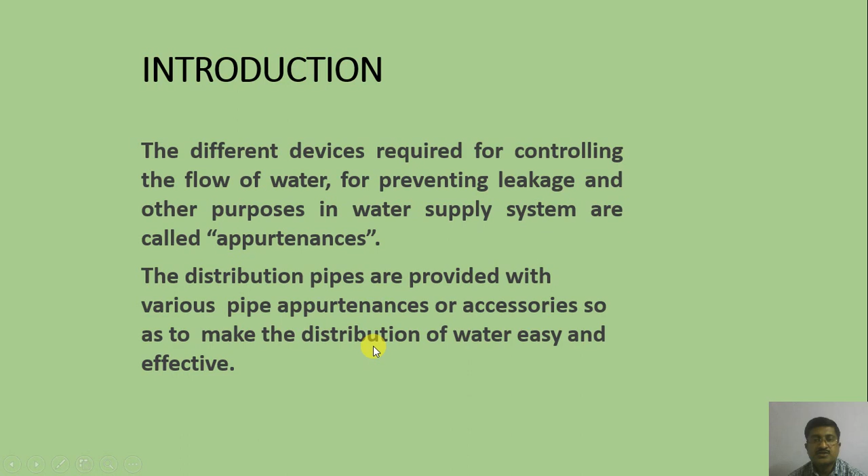What is the necessity of the water supply appurtenances? The main purpose of water supply appurtenances is to make the distribution of water easy and effective, to avoid the wastage and leakage of water, to change the direction of flow of water in the pipeline, to make efficient use of water, to control the flow of water in the opposite direction in the pipe, and to regulate the flow of water.

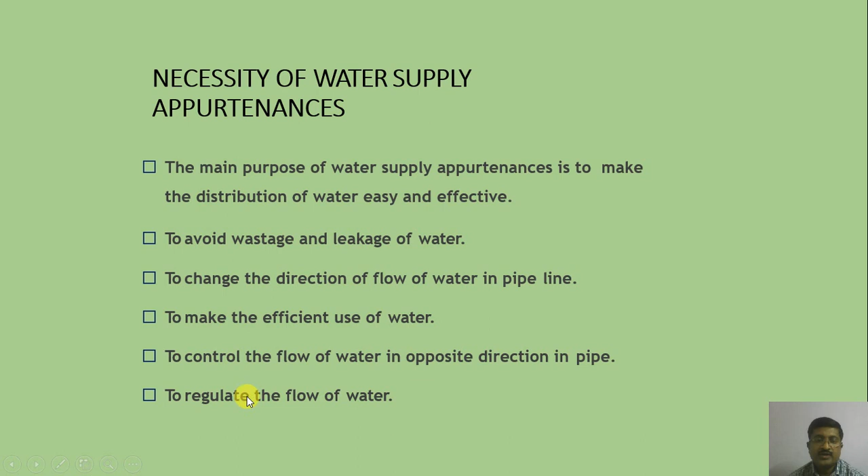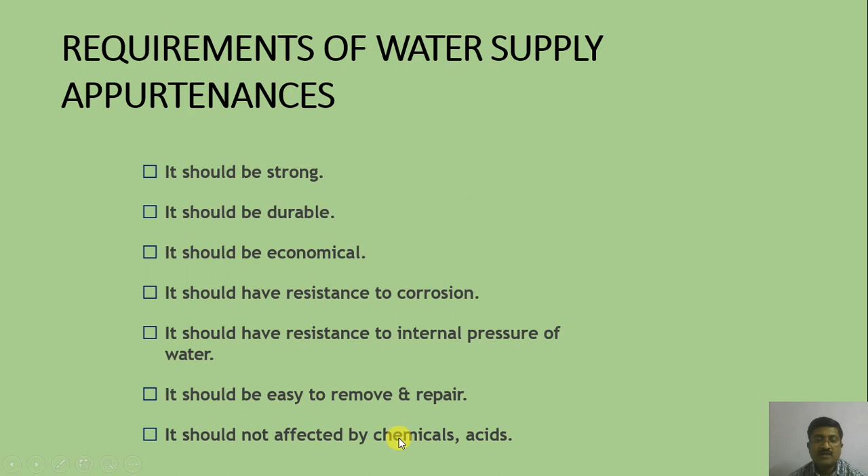What are the various requirements of water supply appurtenances? It should be strong, it should be durable, it should be economical, it should have resistance to corrosion, it should have resistance to internal pressure of water, it should be easy to remove and repair, and it should not be affected by chemicals and acids.

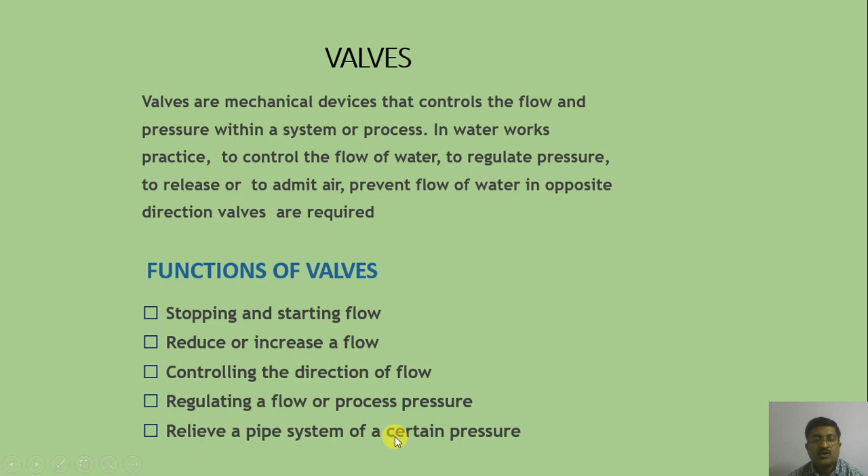Now let's discuss the valves. Valves are mechanical devices that control the flow and the pressure within the system or process. In waterworks practice, valves are required to control the flow of water, to regulate the pressure, to release or admit air, and to prevent flow of water in opposite directions. Functions of the valves are stopping and starting the flow, reducing or increasing a flow, controlling the direction of flow, regulating a flow or process pressure, and relief of a pipe system of a certain pressure.

Types of valve. Depending upon different situations and requirements, different types of valves are used in the supply system. First is a sluice valve, also called a stop valve. Second, check valve, also called a reflux valve. Air relief valve, also called a float valve. Drain valves, also referred to as blow offs. Zero velocity valve, scour valve, ball valve, and fire hydrant.

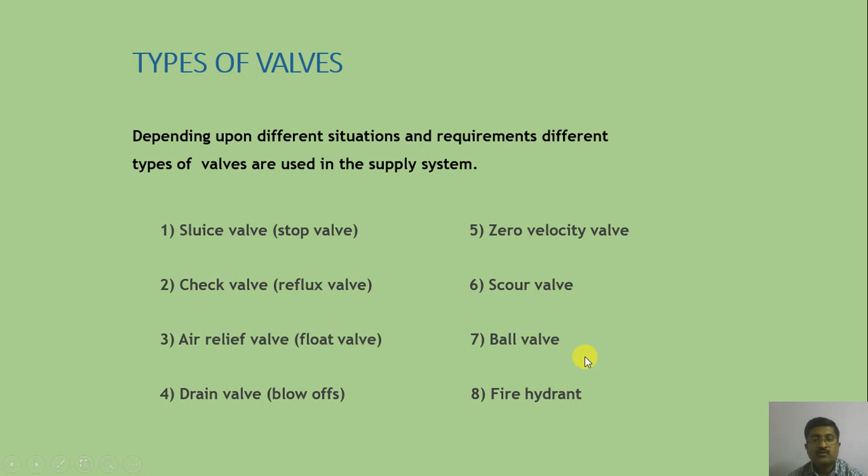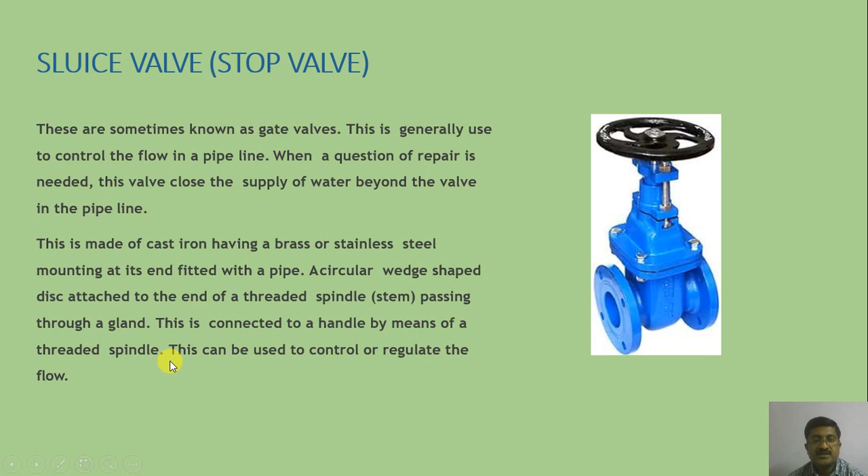This is made of cast iron having a brass or stainless steel mounting at its end fitted with a pipe. A circular wedge-shaped disc is attached to the end of a threaded spindle or stem passing through a gland. This is connected to a handle by means of a threaded spindle. This can be used to control or regulate the flow.

Sluice valves or stop valves are cheaper and offer less resistance to the flow of water than other valves. The entire water supply system is divided into blocks by providing these valves at appropriate places. They are provided in a straight pipeline at 150 to 200-meter intervals. When two pipelines intersect, the valves are fixed on both sides of the intersection. For long straight mains, sluice valves can be installed at a distance of about 1 kilometer to divide the pipeline into different sections.

You can observe this handle. This is a spindle, and this is the valve, which can be used to regulate.

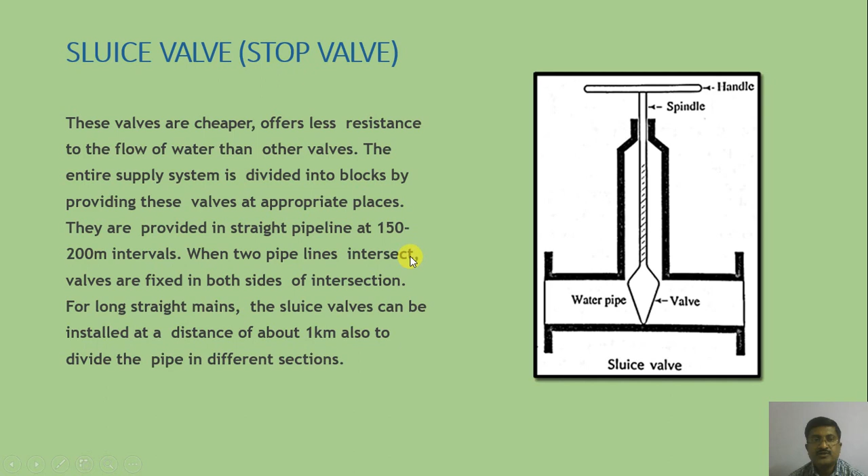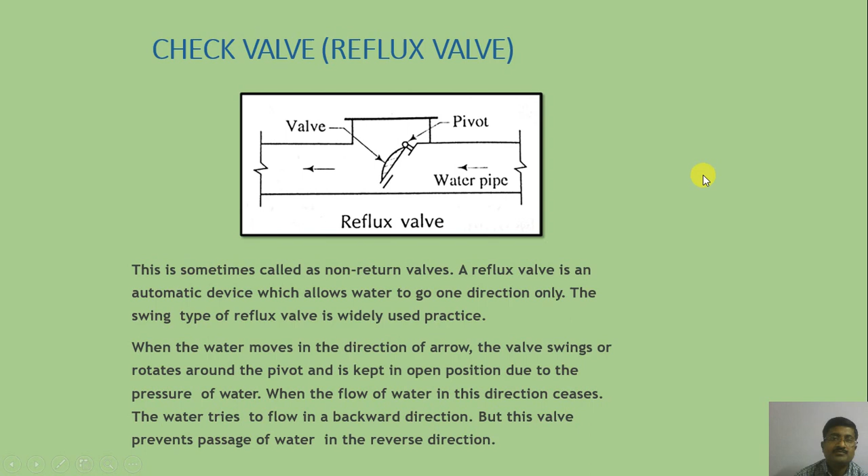Now you can observe here the types of check valve, where the first figure, or this particular isometric view, shows a swing valve, and another view shows the lift valve. Only the mechanism is there, showing how the water will be trapped or controlled. So that is the mechanism.

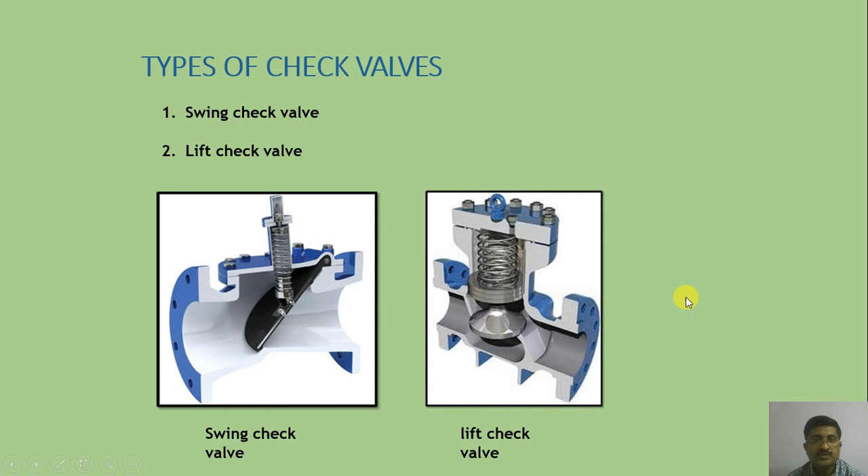In the first case, it is by using the swing mechanism. This valve swings because of the pressure of water, and vertical movement is observed in the case of the lift check valve.

Air relief valve or float valve. In a longer pipeline, air accumulates at high points of the pipeline, which interferes with the streamline flow of water. At such points, air valves are provided which remove the accumulated air automatically. This valve has one or two hollow float chambers. There are air openings at the top, and the valves are connected to the main as shown in the figure.

The float chamber normally remains full of water. When air fills it, the water level goes down and the float falls, thereby opening the air openings at the top through which the air escapes out, after which the chamber again fills with water and takes the float up, which closes the air opening.

So here you can observe the water pipe. This is the float chamber. The poppet valve is also provided here. You can observe the float. The action takes place when the pressure is applied on this.

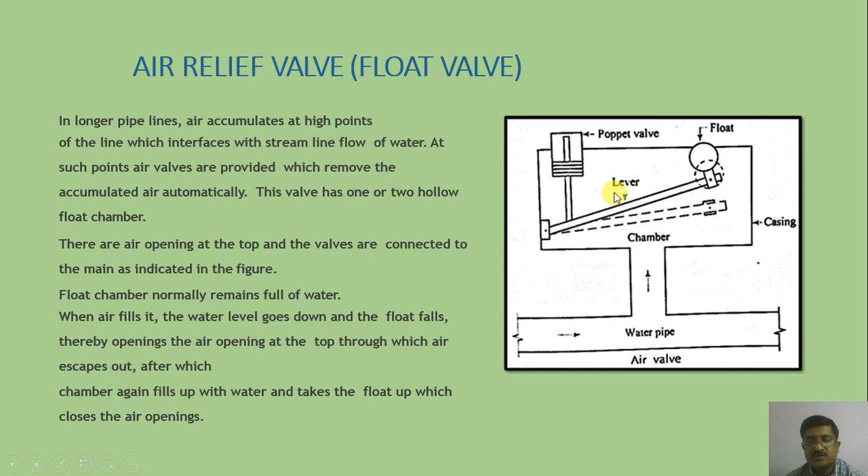In this particular chamber, when the air fills in it, the water level goes down. This is full of water. The water level goes down, the float comes down, and you can see the air opening at the top, which releases the air which is trapped. So here you can see the view of the air relief valve, or float valve.

The air valve consists of a cast iron chamber, a float, a lever, and the poppet valve here. The chamber may be circular or rectangular in shape, and the poppet valve is a valve that is lifted bodily. This releases the air, depending upon how the air is entrapped in this particular valve.

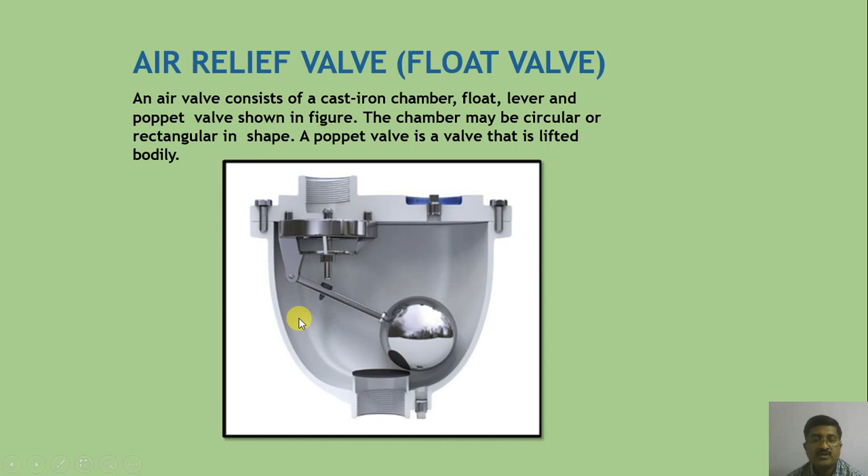Now the various different valves which are generally used in the pipeline: drain valves, also called blow-offs or washout valves. They are provided at all dead ends and depressions of pipelines to drain out the wastewater. These are ordinary valves operated by hand. You can see this handle is provided.

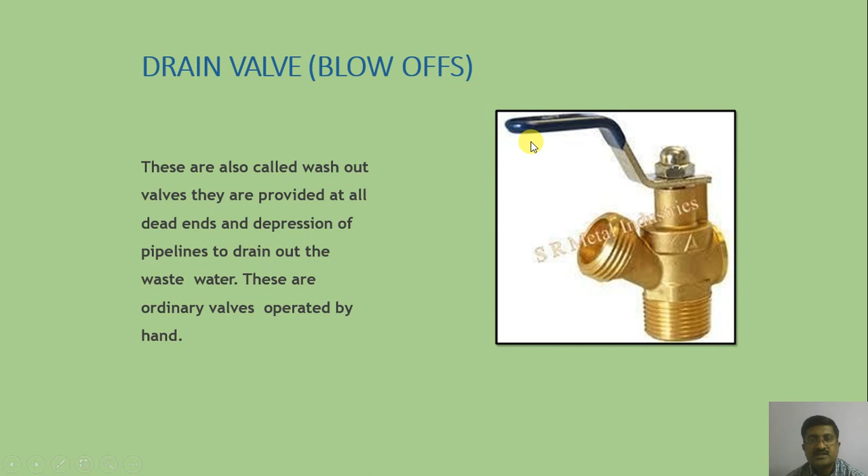Zero velocity valve. The zero velocity valve is called a water hammer arrestor. The principle behind the design of this valve is to arrest the forward moving water column at zero momentum, that is, when its velocity is zero and before any return velocity is established. What are the advantages of the zero velocity valve? Controlled closing characteristics, and low loss of head due to streamlined design.

The figure shows here the zero velocity valve. In a water pipeline, whenever the water stops, hammer is observed, and to compensate such water hammers, this zero velocity valve has been designed, which arrests the hammer which is observed.

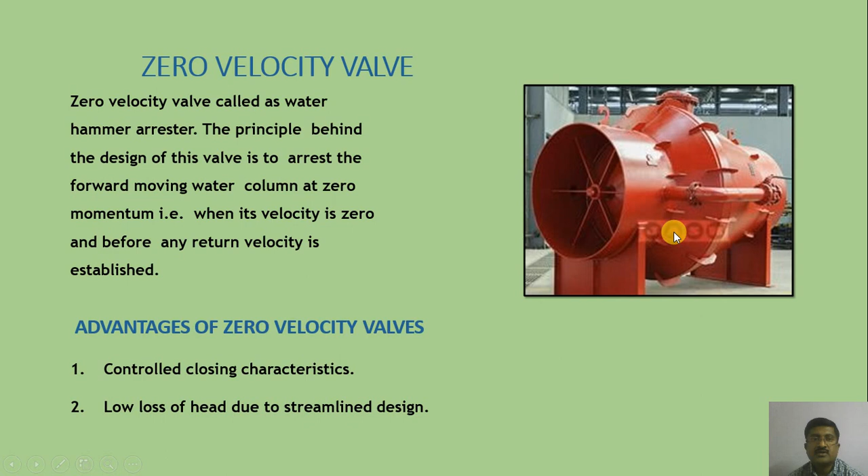Scour valve. These are similar to the blow-off valves. They are ordinary valves operated by hand. It is placed at every depression in the pipeline. Mud and sludge get collected in the pipeline at these depressions, which generally occur when pipes cross valleys, etc. The valve is essentially mounted on a branch of the main pipeline at the lowest point.

When the valve is worked, it removes the dirt due to the high velocity of water. After the complete removal of silt, the valve is closed. This particular type of valve is mounted at the lowest elevation to remove the silt and whatever dirt is present in the pipeline.

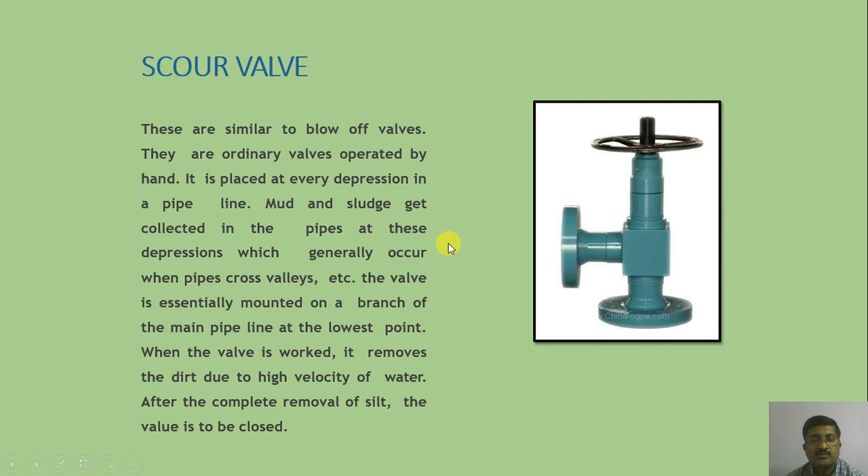Ball valve. A ball valve is a quarter-turn rotational motion valve that uses a ball-shaped disc to stop or start the flow. If the valve is open, the ball rotates to a point where the hole through the ball is in line with the valve body inlet and outlet. If the valve is closed, the ball is rotated so that the hole is perpendicular to the flow opening of the valve body and the flow stops.

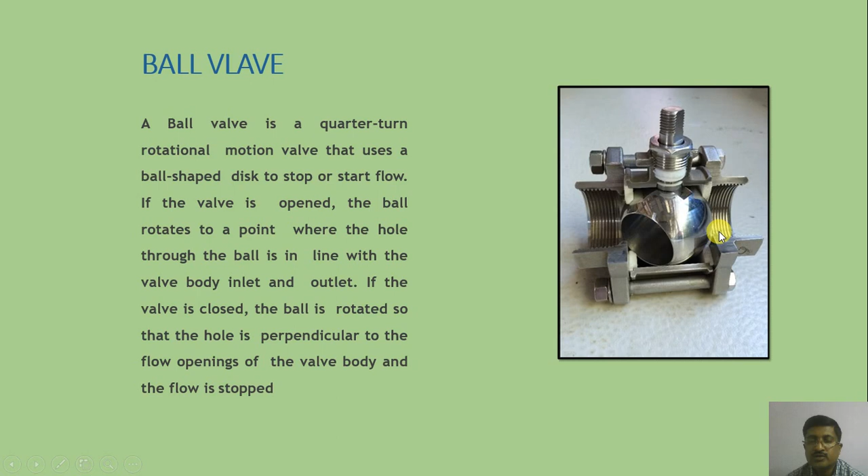Now you can observe here, this is the pipeline and this is the ball, which is provided with this opening or hole. When you want the flow of water, this will be exactly in the direction of the water, and when you want to close it, it will be exactly perpendicular to the flow of water, which ceases the flow.

Fire hydrant. A hydrant is an outlet provided in the water pipe for tapping water, mainly in case of fire. They are located 100 to 150 meters apart along the roads and also at road junctions. There are two types, namely the flush hydrant and the post hydrant.

So you can observe here one fire hydrant. You can see here a water pipeline, and the valve is provided. If you release the valve, because of the pressure, this is the outlet. So in case of a fire hazard, the water can be utilized.

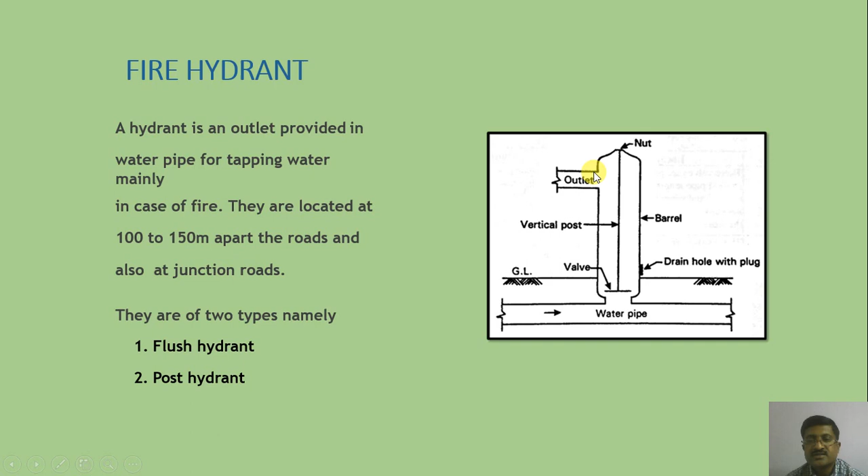Now what are the requirements of a good hydrant? It should be cheap, easy to connect with the hose or motor pump, easily detachable, and reliable. It should function properly and should not go out of order during operation. It should permit undisturbed flow of water when being fully opened.

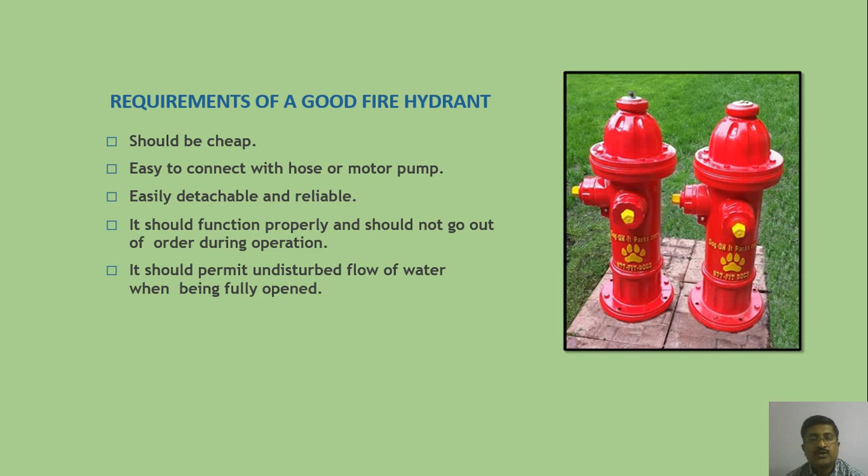Water meters are installed to determine the quantity of water flowing, so that the readings obtained help work out the quantity of water supplied, and thus consumers can be charged accordingly. Water meters are usually installed to supply water to houses, industries, hotels, big institutions, etc. Metering prevents the wastage of purified water.

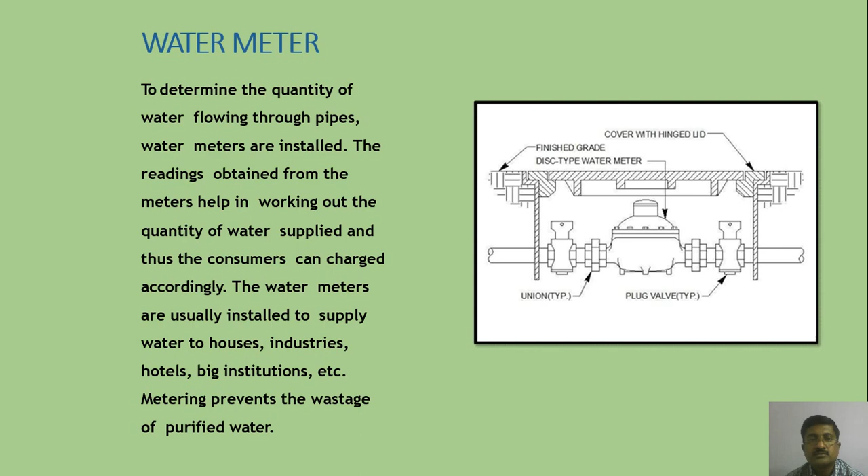What are the requirements of a good meter? It should not offer any resistance to the flow of water. It should measure the discharge up to 2% accuracy. All its parts should be of non-corrosive alloy. It can be easily maintained and repaired. It should be economical, and should have a screen on its inlet side to exclude clay, silt, grit, etc. It should be capable of registering even small quantities of flow of water.

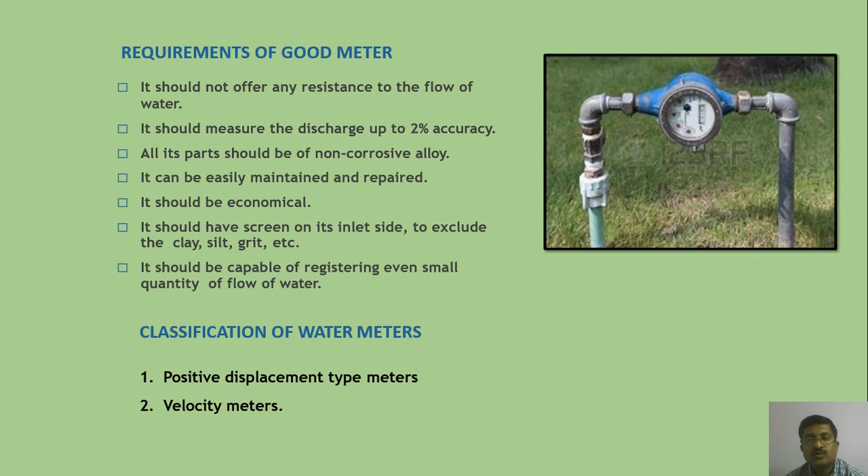There are various types of water meters. Generally, the first one is a positive displacement type of water meter, and the other is a velocity meter. This depends upon the mechanism used in the water meter.

Storage tanks, which we have already discussed, may be kept on the roof of the building or on the ground, and should be watertight. The storage tank should be placed in such a position so that discharge of water can be readily seen. The tank should be provided with an overflow pipe and a drain pipe near the bottom to clean the tank, and storage tanks are provided with an outlet pipe to draw the water.

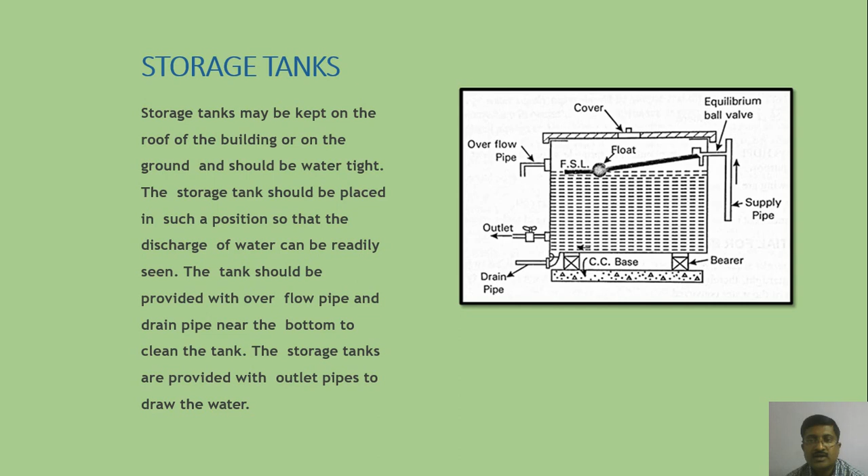So these are generally used at the user's end, you can say these storage tanks. Here you can observe the supply pipe and the outlet, the drain pipe in case of removal of silt, and this is the overflow pipe. If the float is provided there, it stops the flow automatically, controlling the entry of water into the storage tank.

You can also see the storage tanks here. These are the small tanks installed above the roof level and being supported by a strong base.

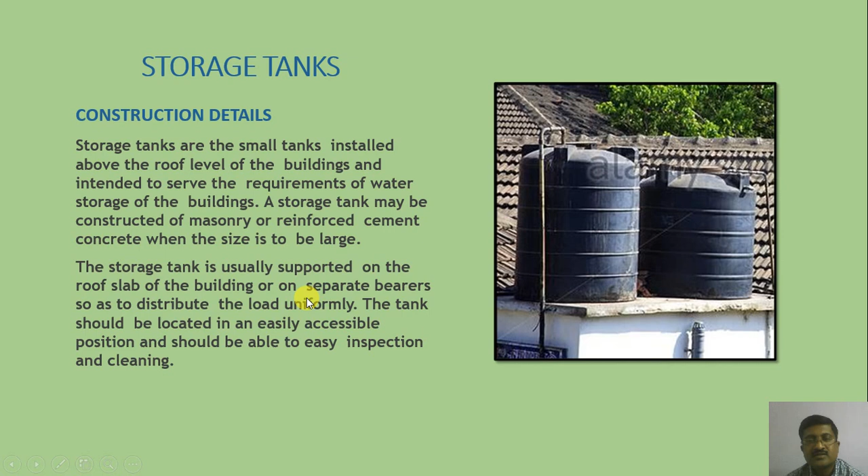Bibcock - these are water taps which are attached at the end of water pipes, from which consumers obtain water. Bibcocks are available in various patterns. This particular figure shows a typical bibcock. It is operated from a handle, and when the handle is turned, the opening from which the water comes out gets increased in size.

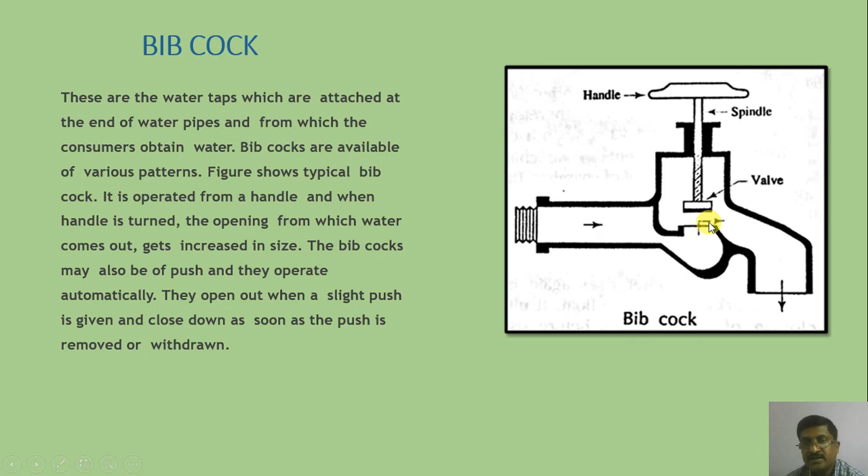The bibcock may also be a push type, operating automatically - it opens out when a slight push is given, and closes down as soon as the push is removed. Here you can see the spindle is provided, so the water comes from here. When the valve is closed, at the bottom of this valve there is a rubber which closes this opening and the water is stopped. So here is the view of a bibcock.

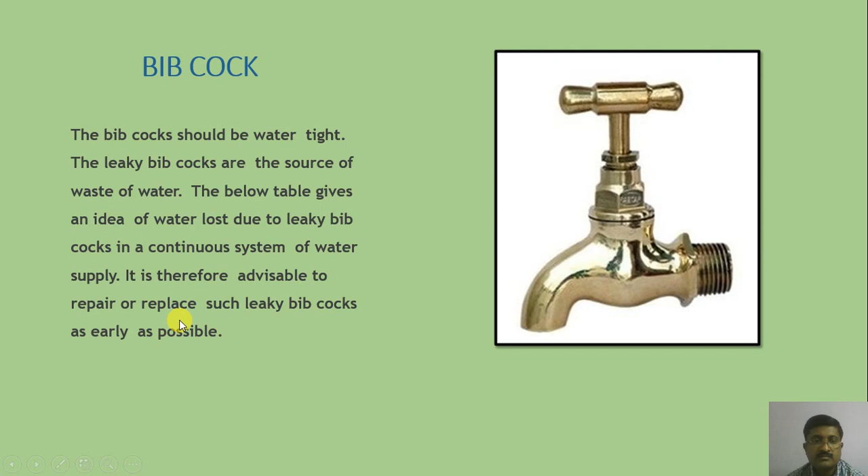Leaky bibcocks are a source of wastage of water. You must take various efforts to avoid the leakage of water. It is therefore advisable to repair or replace such leaky bibcocks as soon as possible.

They are installed in the service pipes serving the bibcocks. They operate on the same principle as a sluice valve, and are used up to sizes of 50 mm. They are placed on the water pipe leading to flushing tanks, wash basins, and water tanks. It should be of a size sufficient to pass the required discharge through the service pipe.

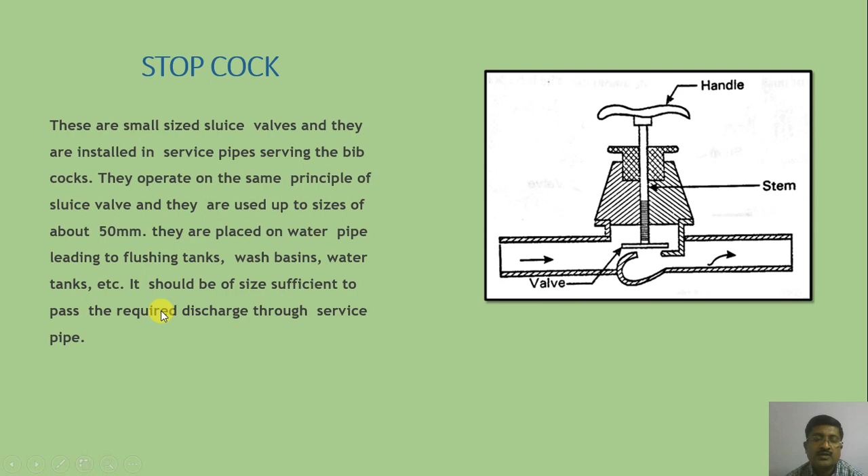Stopcock: it is provided before the water meter service line. The stopcock is housed in a suitable masonry chamber with a removable cover, and is fixed in the street close to the boundary wall in an accessible position. It controls the supply of water to the building from the water main. The purpose of the stopcock is to stop the supply of water.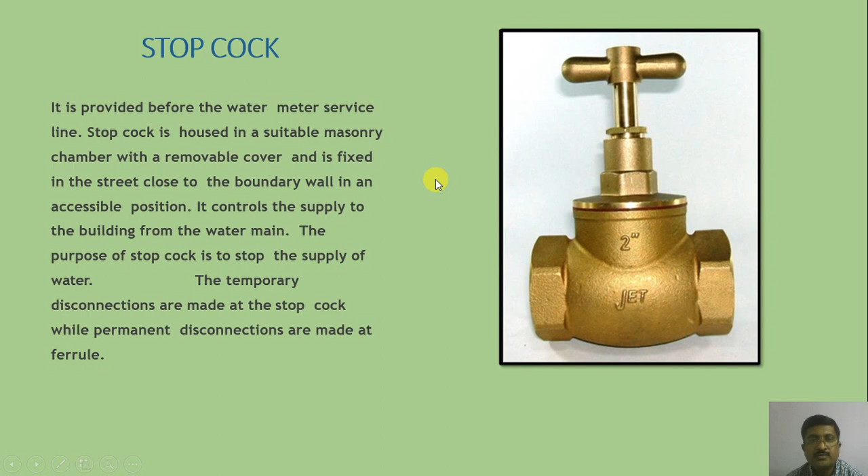Temporary disconnections are made at the stopcock, while permanent disconnections are made at the ferrule. This is connected to the pipeline and is totally used for stopping the flow. There are several other minor appurtenances used in the pipe distribution system or water connections, to regulate the flow, to stop the flow, or to deviate the flow.